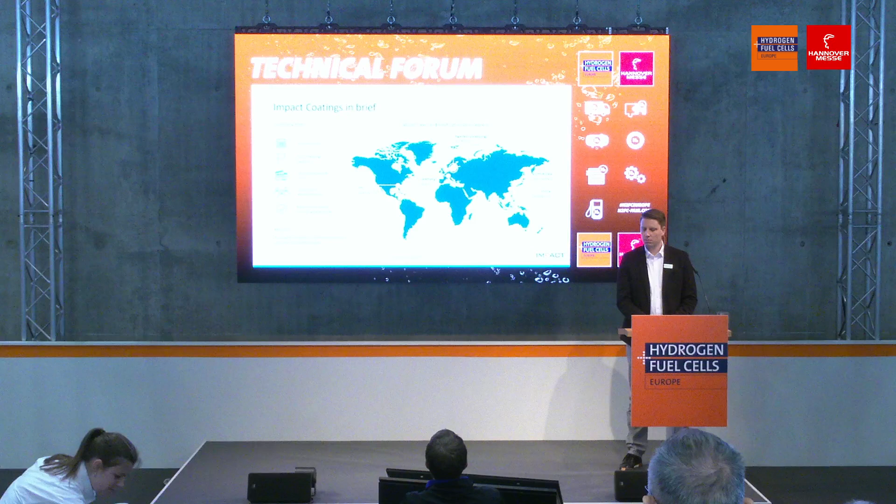Impact Coatings was founded in 1997 as a spin-off from Linköping University, which is a hotspot for thin film physics. Since then, the company really developed and gained a lot of new knowledge, started into the hydrogen activities in 2007, and since then steadily grew, also expanding the global footprint with regard to global sales presence in all the key markets, and continuously new coating service centers.

For the EMEA region, it's for sure our headquarter in Linköping, where we will more than double the size of the coating service center within the next year. Then we have a China facility up and running, and by the end of this year a US coating service facility will add to our offering, in order to be closer to our customers, offer good local coating services, have lower logistic ways, be local for local, and increase technical support to be a rock solid and trustworthy partner for our customers.

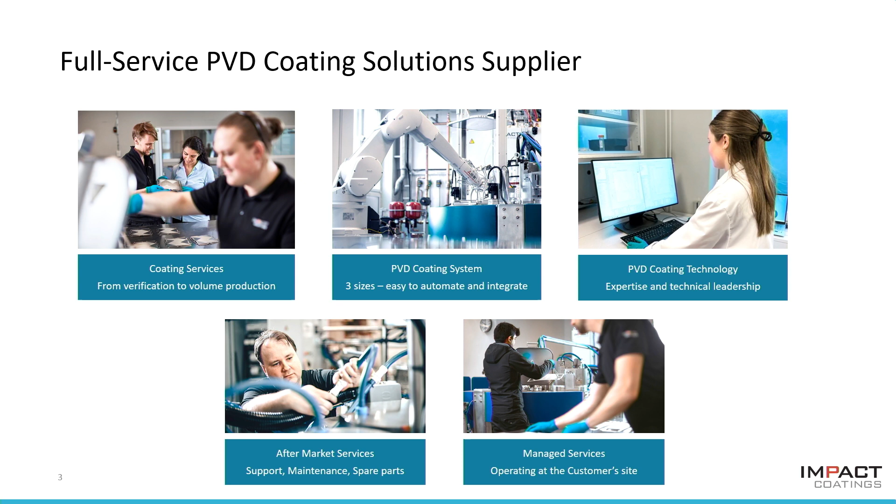Furthermore, Impact Coatings is a full service supplier of hydrogen coating solutions, meaning our coating service centers with an increasing global footprint. Secondly, where we will focus next, our in-house produced PVD coating solutions, and third, the different coating solutions for the different applications, fuel cell and electrolyzers. Next to that, for sure, also the typical aftermarket services as well as managed services on the customer side, if required.

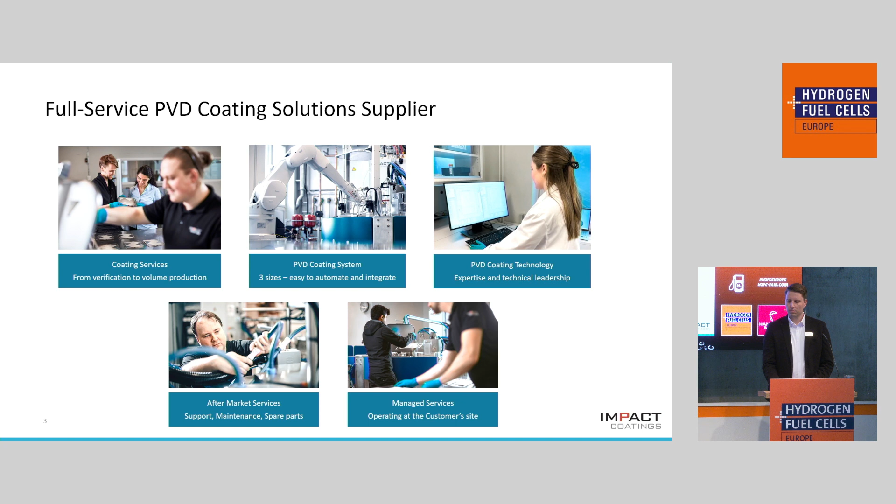The IC2000, already mentioned a few times, was an evolutionary development of the already available 500 platform, which is running and established in a lot of production facilities globally, in series production. So we took all the knowledge and experience out of this platform and put it into our new 2000 platform, where we mainly enlarged the whole system. We doubled the chamber size for up to triple productivity, while still maintaining a very compact, efficient, robust design with a high continuous throughput, meaning low cycle times.

We will have a closer look at that on the next slides, as well as the design for double-sided simultaneous coating in 3 process chambers, plug-and-play installation on the customer side, and last but not least, we also improved our software, making it even more user-friendly and adaptable for our customers.

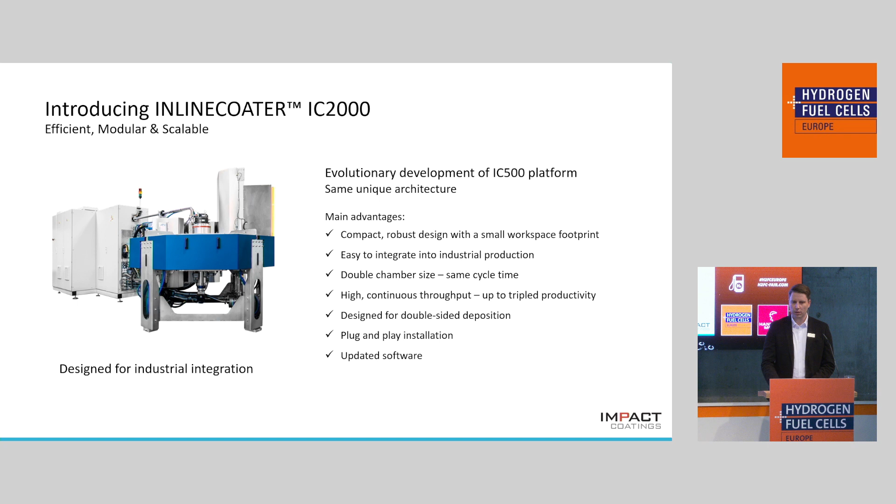I was already repeatedly arguing for the compact and modular design, and here you can see some data. The IC2000 is adding to our portfolio, and it's now our newest and biggest system, with only a length of 6.2 meters, a width of 2.2 meters, and a height of 2.4 meters. Really compact, but still highly efficient with high productivity.

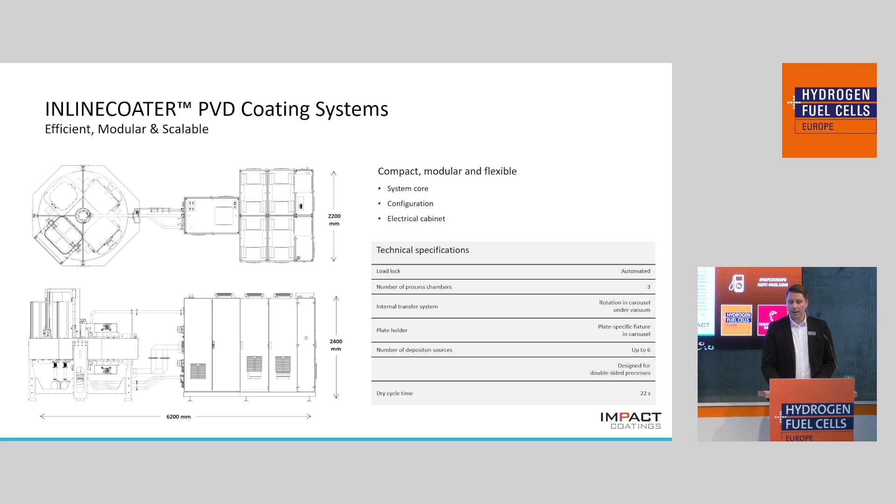On the upper left corner, you can see the so-called system core, where the coating is happening. A little bit darker in this roundish system core, you can see the so-called load lock. The load lock is where you put the uncoated plates and take out the coated plates, and the other 3 chambers are the process chambers.

These 3 chambers are continuously under vacuum, and as mentioned before, can be equipped with up to 6 PVD coating sources, 2 sources per chamber, to ensure and give the possibility of simultaneous coating in these chambers, with the same material, or sometimes even with different material at the same time. The transport of the substrate is done with a carousel, turning and transporting the substrate from chamber to chamber, and the dry cycle time is 22 seconds.

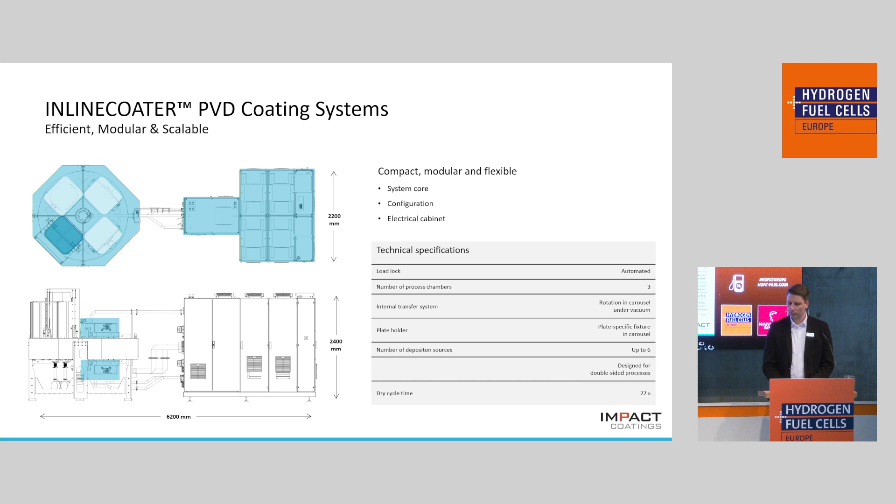Now, as mentioned before, we have one equipment suitable for different applications in the hydrogen environment. Having a closer look at the electrolysis coating solution, you can see again the IC2000. The chamber size of this machine is 650 millimeters by 550 millimeters, and out of experience, taking average fuel cell plates into account, you can fit 1 to 2 plates in this chamber.

Therefore, with a cycle time—talking about noble metals here—of average 30 seconds, you have a throughput of up to 120 batches per hour, which leads to more than 1 million plates with this small, compact, but highly efficient system. Nevertheless, we have the flexibility in these 3 process chambers to adjust. For electrolyzers, we talk normally at the moment about noble metals.

You can have both sides, platinum, gold, iridium coating in one chamber, and simultaneously platinum from top, gold from the bottom, or first platinum in the first chamber, gold in the second chamber. So whatever you need, the flexibility is very high, and we can adjust it to customer requirements.

Furthermore, we are running a modular configuration, so even if you have already invested in our machine and have them on site, the hydrogen market is dynamic, requirements are changing. With this architecture, it's fairly easy to replace or adjust the PVD sources you use on the machine, so you can quickly and easily adapt to new market requirements or customer requirements coming up for your solution.

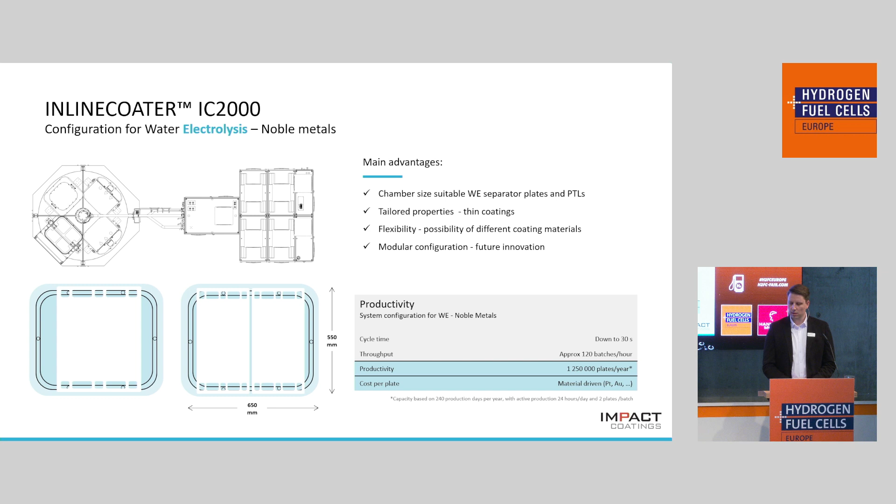Cost per plate is also always a very important question with regard to noble metals in an electrolyzer environment. It's very hard to answer because the costs differ quite significantly, even gold, titanium, platinum, depending on thickness and the customer request. So it's hard to tell, but we have TCO tools available. In case you want to learn more, please approach us, and we are happy to discuss this further in detail.

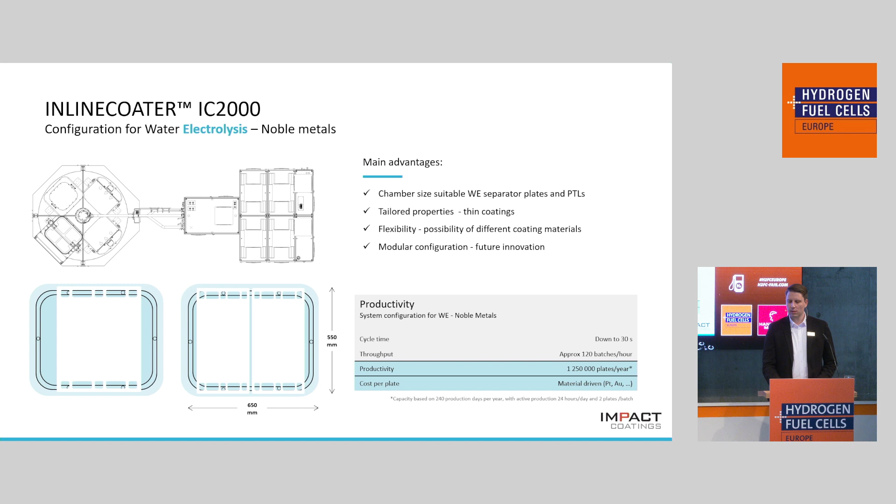Now, next to electrolysis, for sure, there's also a fuel cell application. If the next slide is coming... Yes, here we go. The advantages of the machine are basically the same. It's the same setup.

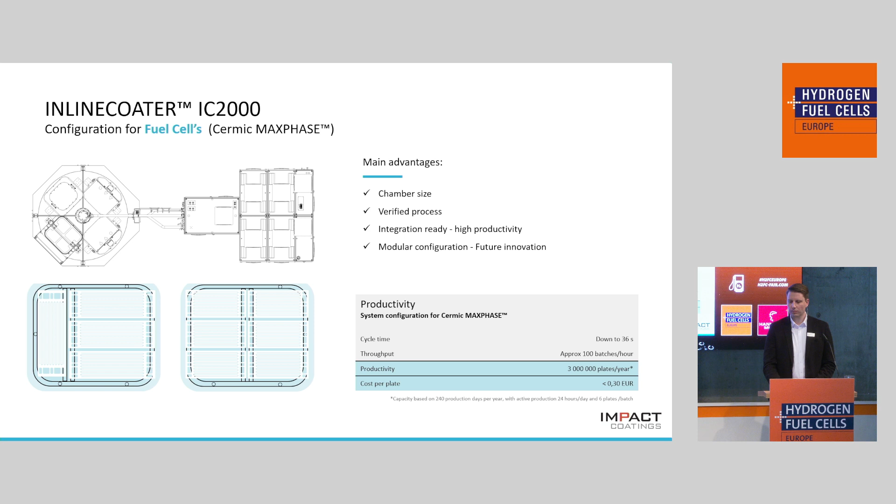Now, I was repeatedly trying to give you the clear message that we have quite a different architecture, which is a little bit more compact, a little bit smaller. And on this slide, I really want to argue again why, and which benefits we see that come with it.

Because talking about scalability, we are really convinced that in a hydrogen environment, towards a hydrogen society, a lot of investments, a lot of money needs to be spent at the moment. And a lot of companies not only invest in hydrogen, they also have to transform the old business, battery electric and normal electric vehicles in the automotive area.

And therefore, we believe a cost-efficient and lower capex investment with a scalable solution - buying one machine for ramp-up scenarios, and as soon as the market or your customers demand more, you add a second machine, a third, a fourth - while still maintaining a footprint which is not necessarily bigger than a traditional coating machine in the market, is really a very good argument for this unique architecture, which is efficient.

We talked about it - short cycle times, low energy consumption. This machine is using one turbo pump. We have small batches, so in case something needs to be scrapped, the scrap risk is minimal.

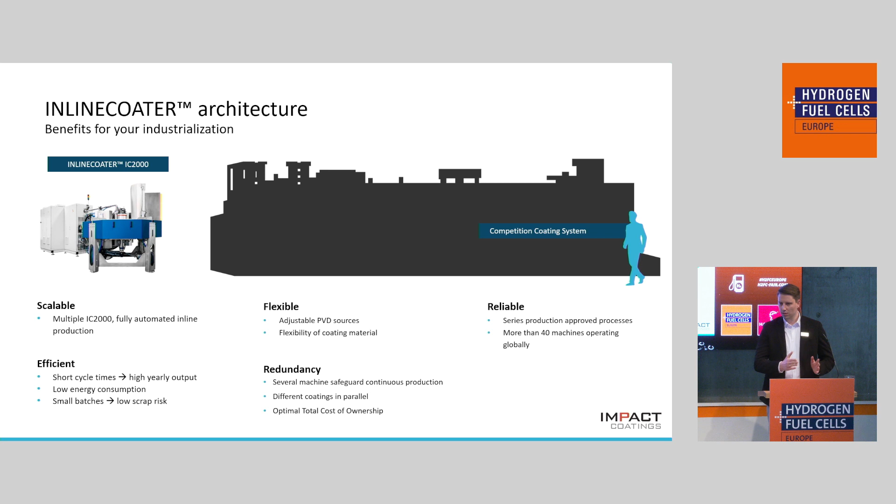Flexibility, we've been talking about that. Redundancy - you have 6 machines in a row, you can coat different solutions in the same setup - and the reliability of well-known processes. And then last but not least, in order to get the most of these arguments, automation is key.

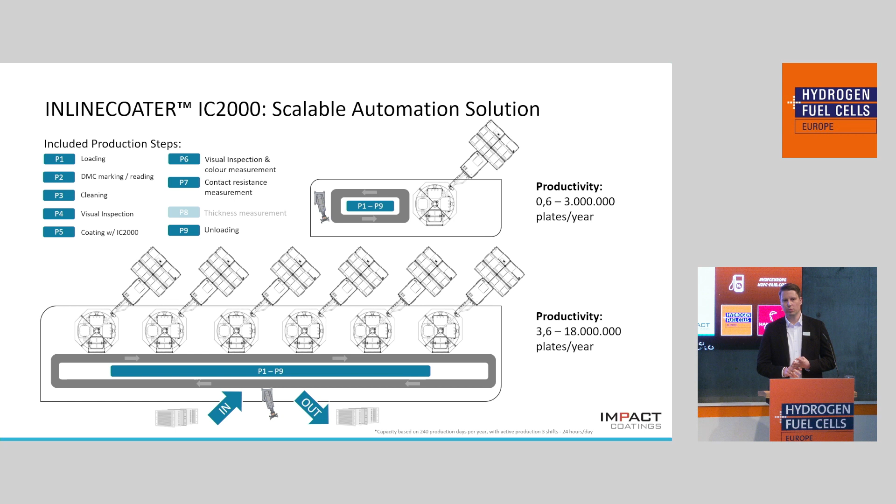And we offer also here a scalable solution, automating one machine up to 6 machines to get the best and most beneficial out of the complete setup, offering loading, unloading, DMC marking, coating for sure, and all the quality assurance topics - visual inspection, thickness measurement, contact resistance measurement, you name it.

In order to conclude, because I see I get a little time pressure here, I want to give you 3 takeaways. Impact Coatings: 25 years of experience and a lot of knowledge. Full service supplier - coating services, loan coating, own product equipment and solutions for fuel cell and electrolyzers - and last but not least, a unique, scalable and cost-efficient design.

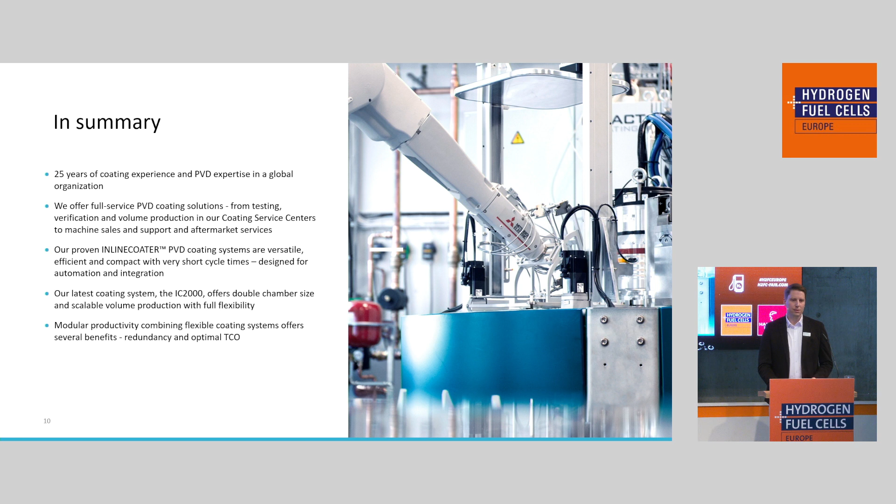I really hope I could make you curious, and would like to invite you now, as a closing word, to come to me and my colleagues at booth C19 here in the hall, and we are happy to discuss how we can support your industrialization projects in a hydrogen environment. Thank you very much. Thank you.